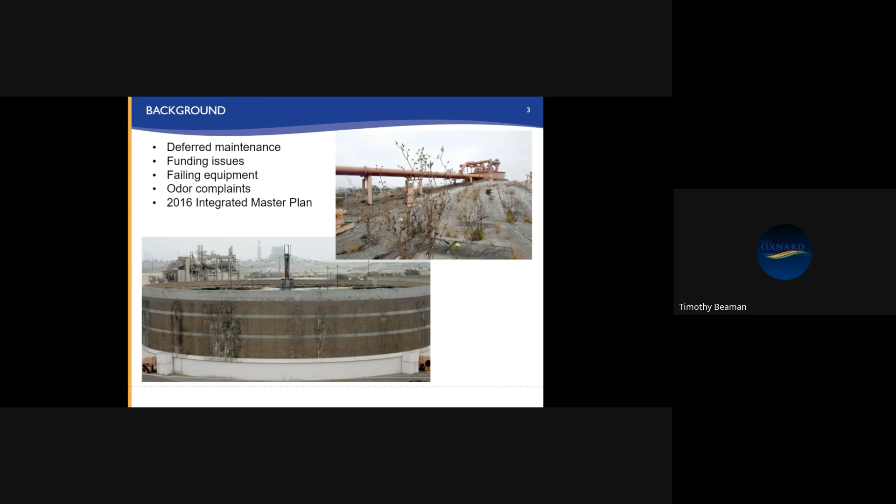Just to give a little bit of background, going back to the 2016 integrated master plan, we had a number of projects that were identified at the wastewater treatment plant and within our collection system. This is a result of about 20 years of deferred maintenance, some funding issues, failing equipment, and also a number of odor complaints.

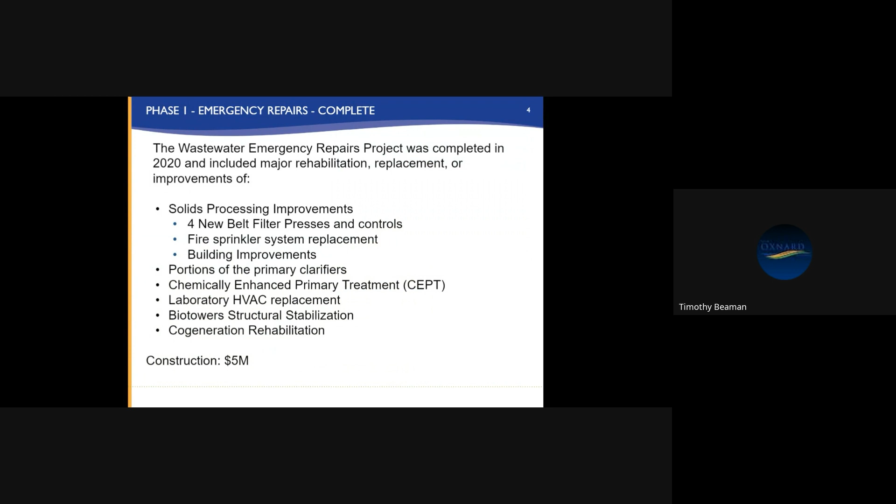So going back to phase one of the emergency repairs project, it was completed in 2020 and included major rehab and replacement of some of our solids processing, portions of the primary clarifiers. We added chemically enhanced primary treatment, where we added chemical prior to the primary clarifiers. We did some improvements to the HVAC within our lab, stabilization of the biotowers, and rehab of the cogen engines. The project budget for that was $5 million.

So we had a design budget of 5.5 million, construction of 55 million, and with contingency and CM right around 10 million. So the total project budget for this is just over $70 million. Since we're in the middle of this project, we have several videos to show you and footage of progress.

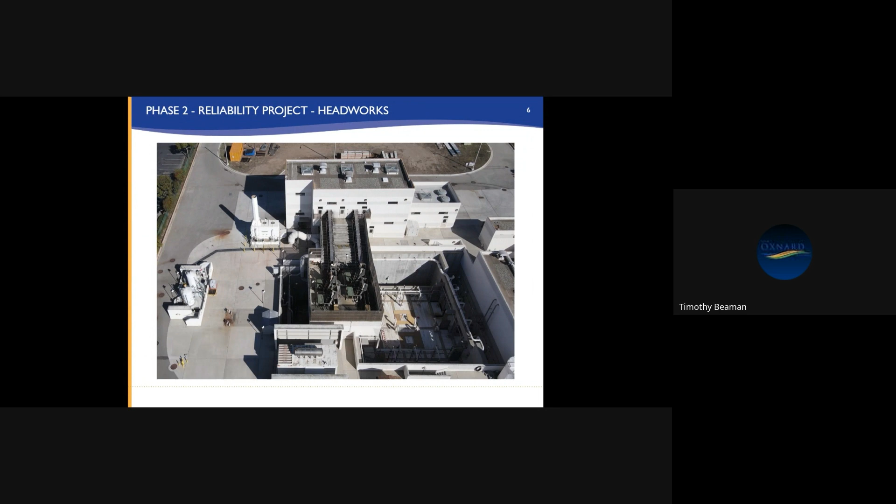Again, so we're doing some structural rehab of headworks. We're also doing additional odor control to help out with our neighbors next to us in Port Hueneme. This is the odor control unit that we're adding. And again, this will take care of some of the H2S and odor issues that we used to receive calls on. Lately, we have not received nearly as many of those calls.

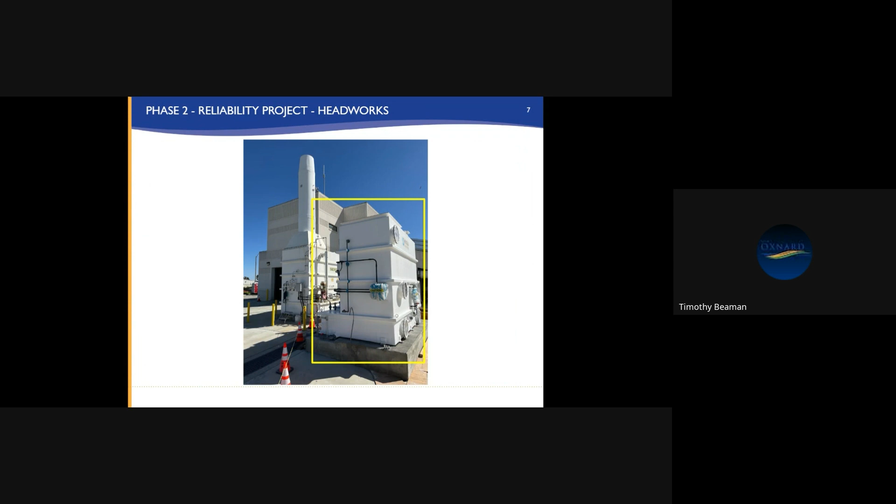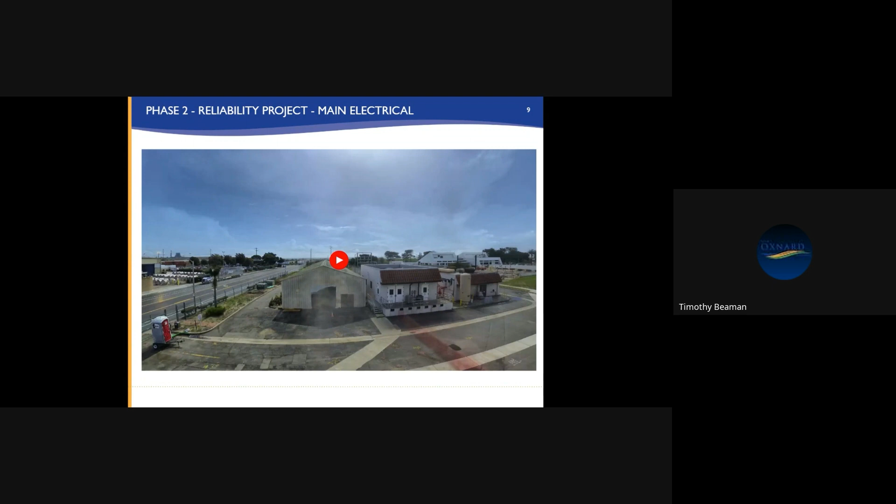So the main electrical, this is one of the primary parts of the project. Over $10 million for the entire budget of the project is going to this main electrical building. This is a short video on how we've gotten to the point that we're at now, including the tear down of the old maintenance. So you can see through there, we did a number of piles. It went very quickly, but we had to do some foundation reinforcement. Lots of conduit going in the ground.

Part of this building as well is elevated roughly 4 feet, and that's to accommodate any climate action or future flooding that might occur. And the CMU block going up, and the rest of the conduit going in around the site. Here's an aerial view with the roof rafters in place and some of the SCE equipment going in on the pad.

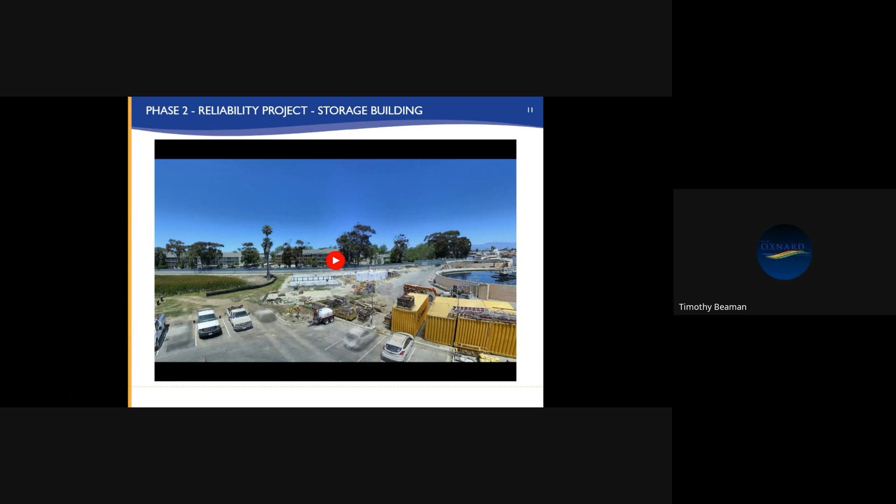Next up, we have our storage building. There was a building previously on site. It was quite corroded and not safe. And this building is meant to replace the old building that we tore down for the new electrical facility. So as you can see, everything is coated and painted, and that's to accommodate not only the corrosive nature of the wastewater that we have nearby, but also our proximity to the ocean. Here's an aerial of the building as it sits today.

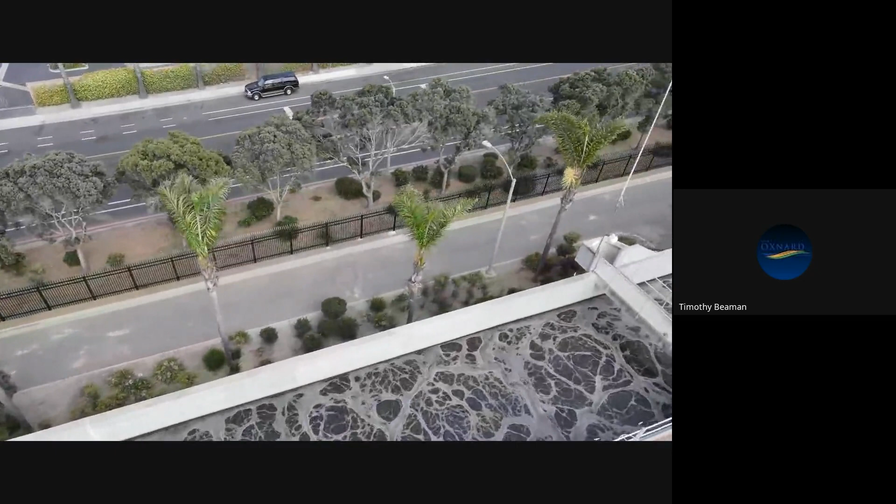So site security improvements are another major portion of this project. We are adding lighting, video surveillance, and physical barriers to the plant. This has been an ongoing problem for the last couple of years and something that we're addressing now.

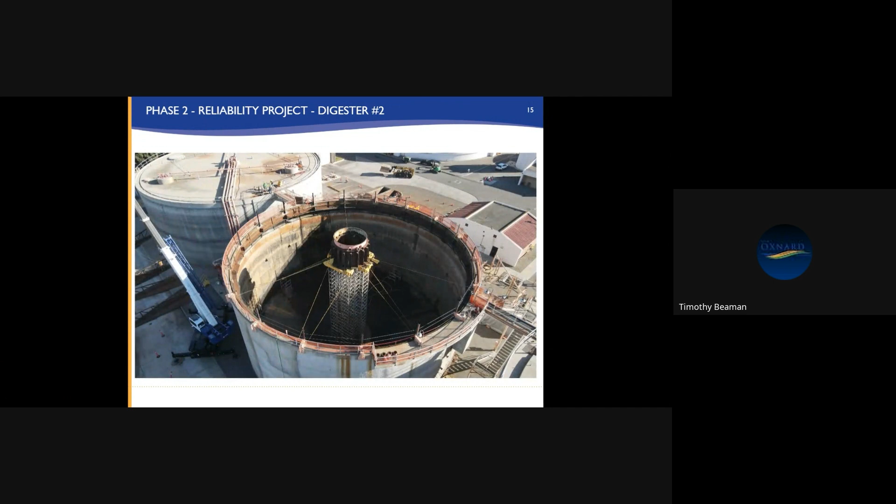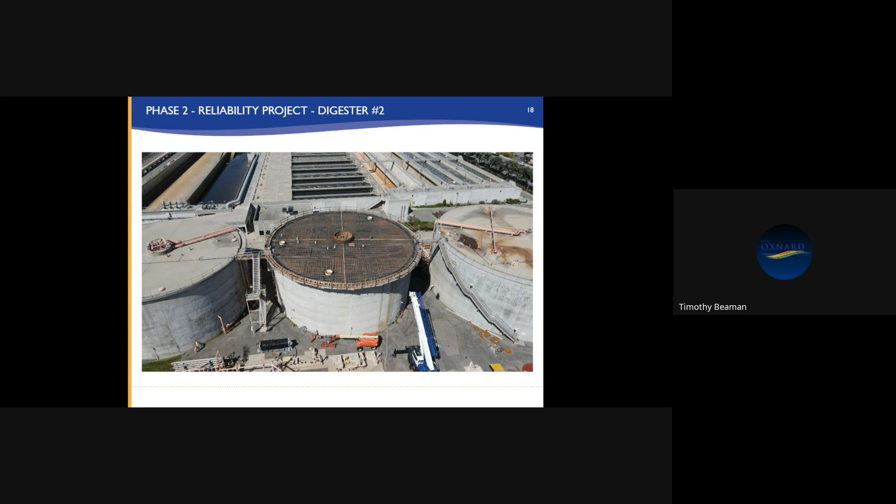Digester number 2 is another major rehab portion of the project. This is the roof being removed. This digester has been out of service for roughly 25 years. So this is the roof completely removed, with a lot of the pipe work also removed. There's a good amount of work that went into forming up the new roof, including scaffolding, rebar, and as of today, this roof has been completely poured. And here's an overall site aerial view of the project.

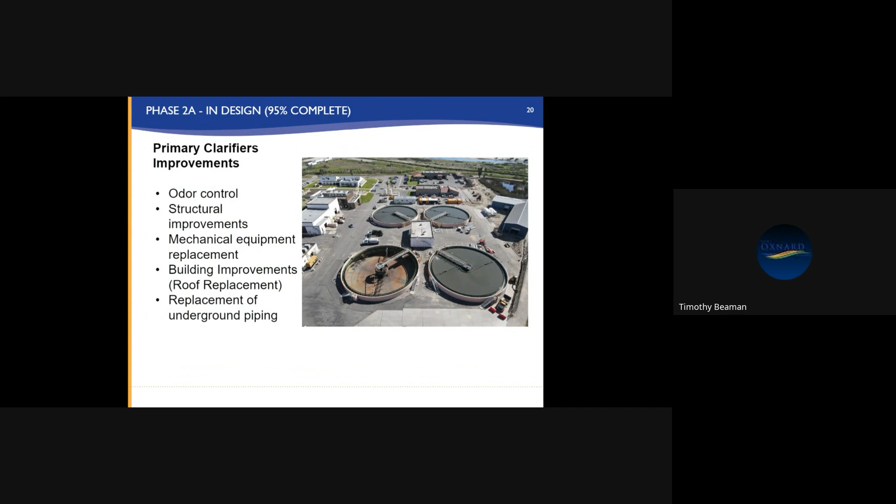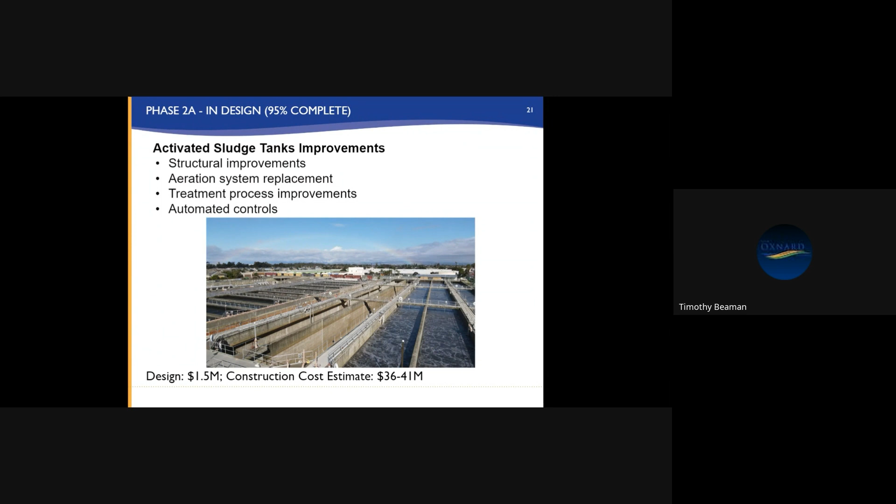So what we're calling phase 2A is about 95% complete. And this includes improvements to our primary clarifiers. We are going to be doing structural improvements, replacement of mechanical equipment, some site civil, replacement of underground pipe, another major rehab for the plant. Included in that project is work on our activated sludge tanks. It also includes structural improvement, full mechanical replacement, and we also are going to be making some changes to our treatment process to accommodate the eventual demolition of the biotowers.

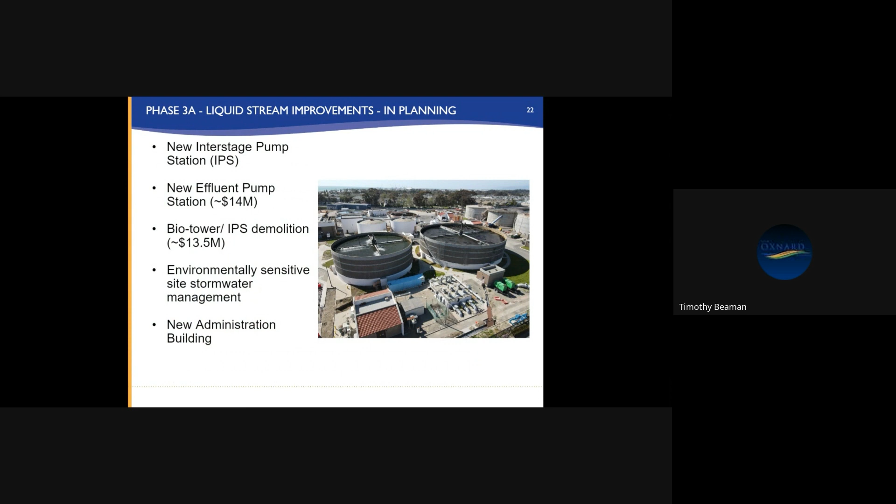Phase 3A includes liquid stream improvements. So we have already done preliminary studies on a new interstage pump station, changes to our effluent pump station, biotower demolition that will be accommodated for with our AST project. We're also looking at environmental sensitive site stormwater management, making sure that we keep everything on site. And we are working on a new administration building.

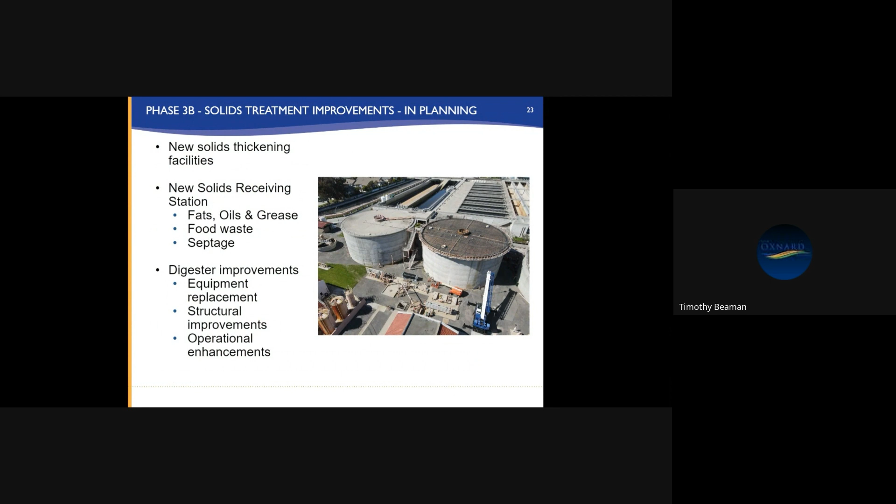Solids treatment improvements. So this includes solids thickening at the plant, a new solids receiving station. We're looking at fats, oil, and greases. We've completed a study on food waste and receiving septage from our neighboring communities. The digester improvements are a continuation of the improvements to digester number 2, where we'll be looking at digesters number 1 and 3. In a similar nature, those will include structural improvements and operational enhancements.

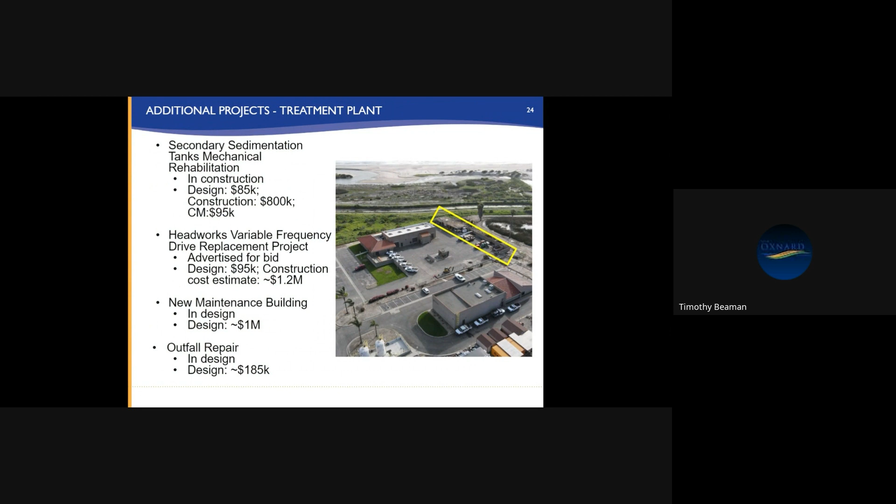Additional projects for our collection systems, we have lift stations 1, 2, and 30. It's currently in construction, and it includes a rehab of lift stations 1 and 2 and a meter being added to number 30, along with a force main added to lift station number 1. We also have the Eastern Trunk Manhole Rehab and Replacement Project, similar to our Central Trunk Manhole Rehab and Replacement Project. We're going to each manhole along the trunk line and taking remediation measures to extend the life of the facility.

On Ventura and Rice Road, we're replacing a gravity sewer that was identified in the 2016 integrated master plan. That includes upsizing of the gravity main on both of those roads. These were 2 separate projects, but for an economy of scale, we decided to join them together.

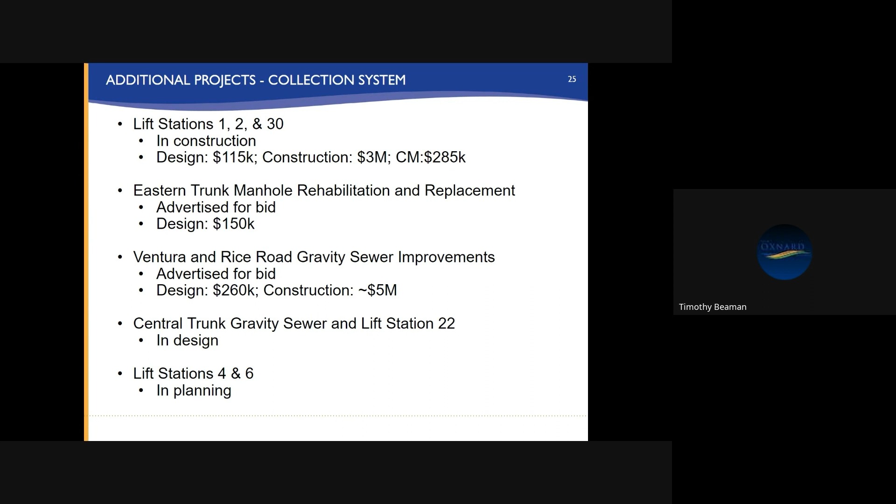We also have the Central Trunk Sewer and Lift Station 22 project, resulting from a failure underneath the Union Pacific Railroad about 5 years ago. In order to get within the railroad design standards now, we do have to replace some gravity sewer and install a lift station. Finally, we have lift stations 4 and 6. This is in the planning stages where we're looking at conceptual design, the possibility of maybe combining the 2 lift stations or rehabbing each one in place.

Other additional updates, per industry standard, we're looking at changing the name of the plant from the Oxnard Wastewater Treatment Plant to the Oxnard Water Resource Recovery Facility. We are also renewing our NPDES permit, which goes to the board this month. We are nearly complete with our wastewater rate study. We're looking at our rates and our future CIP, and we'll be bringing that to council around the end of the year.

We also have our pre-treatment program update, which is part of source control. This is looking at wastewater prior to entering our collection system, making sure that it has a quality that complies with our regional standards. Updates to the regional sewer agreements, so our agreements with the military installations and the county. We are also continuing some research with PFAS and our biosolids.

And since we are so far along with doing plant upgrades and kind of bringing the plant to modern day standards, we're able to look at things like aeration optimization and doing pilot studies for our future projects. Our wastewater surveillance testing is similar to what we did through the pandemic, where we are testing for COVID and the other constituents in our wastewater.

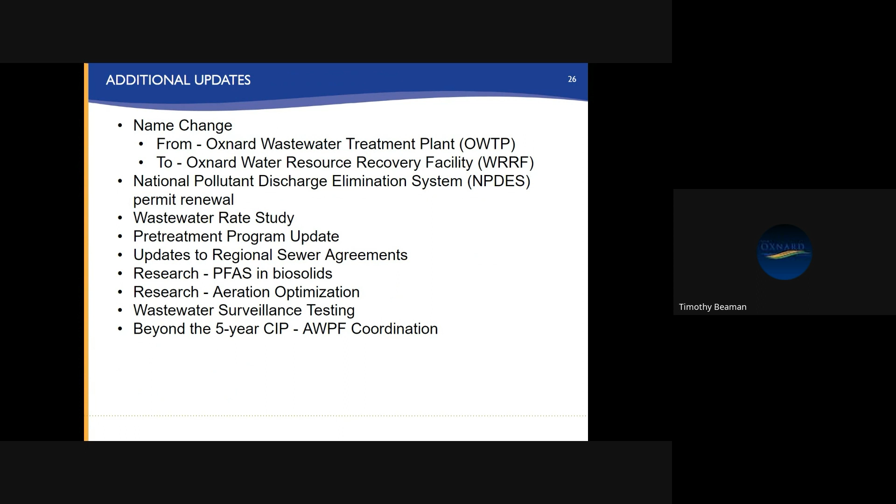And then finally, we're looking beyond our 5-year CIP and our future with the AWPF coordination. So again, since we're tracking along and bringing our plant up to modern day standards, we're able to look at optimizations within our plant operations and our treatment process in order to facilitate better operations with the AWPF. And that concludes our presentation.